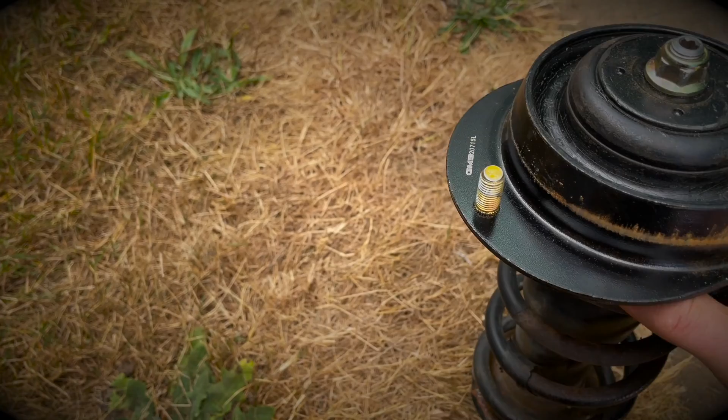Fellow Sambarians. So, as you can see, I've got Goober Chan, my green Sambar Dias, with me today. EN07F, which is fuel injected, KV4, which is four-wheel drive.

We're going to be doing connecting rod bearings in this old girl today. She's been kind of making a little more chatter back there. That makes me very nervous. I have a Sambar here that's got a hole in the block, so I don't want it to get to that point. Depending on how well the oil was changed in Japan and how often it was changed in Japan can certainly determine how long those rod bearings are going to last.

When I did do the red valve cover, it was pretty gunky inside, so I would say that oil changes weren't a top priority for the van. So with the noise that I'm hearing, which is a pretty distinct noise, it's under high revs. You can hear it like a rattling noise a little bit. I'm starting to hear that.

And other ones that I've changed the rod bearings on were really bad, and under any acceleration you would hear that. And that's basically the rod slapping on the crankshaft. So I don't want to damage the crankshaft by spinning a bearing and all that stuff. I would rather just change the bearings now.

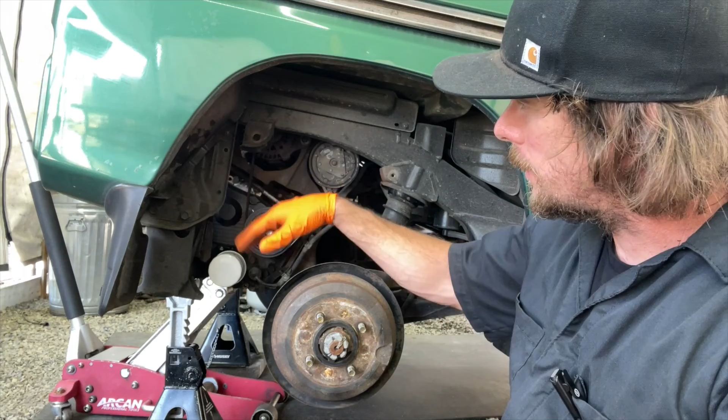Okay, so as you can see, I have access to everything. Taking that panel off, which is 10 millimeter, 10 millimeter, and then there's a 10 millimeter on that little crossbar right there. Those are two 14 millimeters holding the crossbar up, so just take that off. That makes it easier.

What also helps is let the e-brake go. Don't set your e-brake so you can get this thing to spin freely. And now I'm going to get the puller and we'll pull the inside, the inner axle out only. But I'll get the slide hammer, and everything is clean down here right now because I just did a timing

kit. So new crank pulley, because these have a rubber balancer in there, so harmonic balancer, so these can separate over time. So I got a new pulley in there, new belts, new covers. So everything looks really good here. It's just when we go here, not so good. Not really leaking oil, it's just rusty. I mean, look at that. There's like chunks ready to come off of it. But yeah, let's get that axle pulled out now.

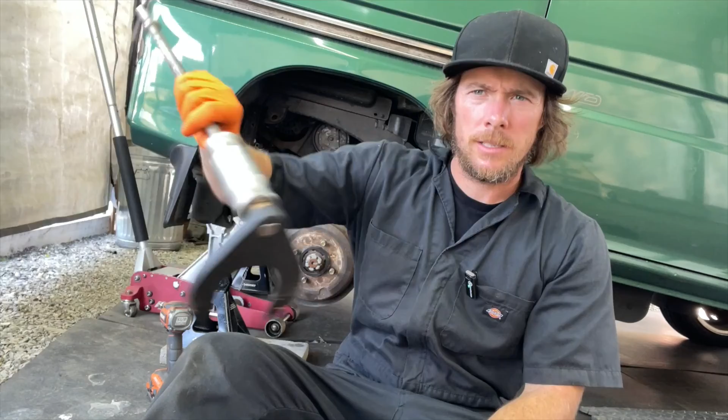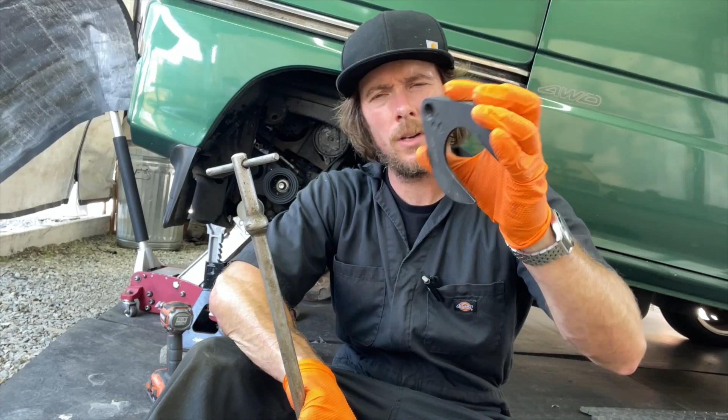So if you're still watching, good, because I'm going to give you a little tip here. So if you get a slide hammer off of Amazon or something, they're going to have two different tips or two different ends, claws. And the smaller of the two, I think it's like 40 something. I could be wrong, don't quote me. It's just the smaller one. The smaller one works on the Sambars for the front and the back.

But let's say you have an Acty as well. The Acty takes the 63 millimeter claw, takes the bigger one. So just keep that in mind. If you get a slide hammer and you get the two attachments, the small one is good for the Sambar and the big one is good for an Acty. So I'm going to go ahead and take this one off, since I had to pull an Acty axle the other day to do a boot.

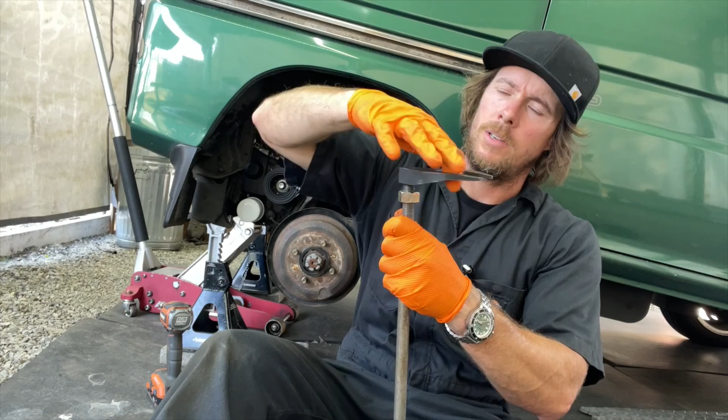We'll put the Sambar one on, or I should say the one that fits the Sambar. And I mean, this is a really good tool to have anyways. Makes pulling the axles out so much easier. It's still a bit of a struggle, but it makes it easier. So let's go ahead and pull this axle out. So pulling the axle can be a little frustrating. Just don't give up. Just the trick that I figured out, which, yeah, it sounds pretty obvious, but in the moment, you're just frustrated.

Pull on it. Pull on it as hard as you can. Like, really lean back as you're pulling on the end and slide the hammer back. Don't just use this as like the force to pop it out. You really want to lean back, full body weight, and slam this thing back as hard as you can. That's the trick, because otherwise you'll be fighting it just trying to use this as the pull force only. But if you're just pulling on it and then pop it, you'll get a good pop, and then this will happen. Boop, there's our axle, it's out.

So I'm actually gonna go get something to hang that thing up on so it doesn't just dangle and rip the boot. So I'll be right back. But okay, so I took a tow strap, I have it pulled up against the control arm and out of the way. That way we have all of this room.

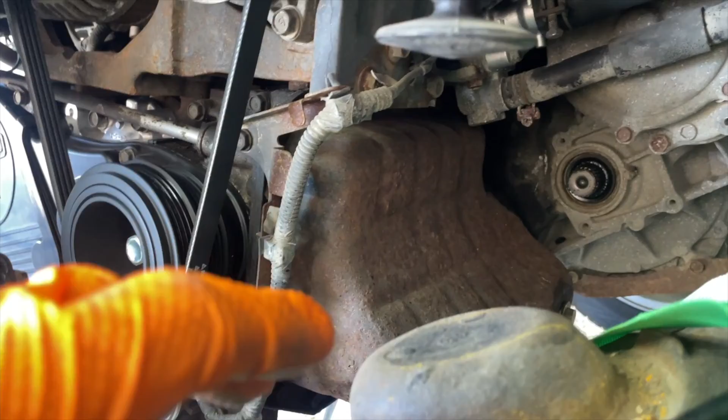Now, I'm just saying, there might be some comments. You don't need to pull the axle. Yeah, I know you don't. You can do it leaving the axle in, but it's a pain in the butt. Or at least it's just a lot easier if you have the axle out. So I'm going to save myself the headache and remove the axle.

I got some visitors. Where'd they go? Let's see. There, well, there's Mamacita. Hi, little peepees. Oh, hi, patitos. See you later. It's a hot one today. They're probably going to find a pool.

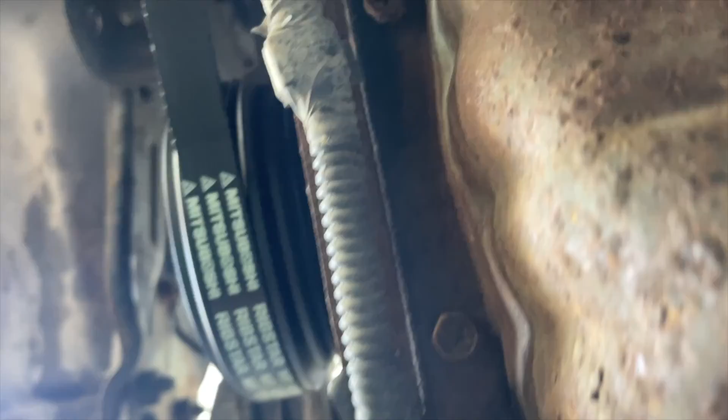Yeah, let's get that oil drained and get some new parts on this girl. So now that we have as much oil as we can drained, we'll get all the 10 mils. So there's a couple back there by the bell housing, and then along the top, and then along the side here. I don't usually remove this wire loom support bracket deal.

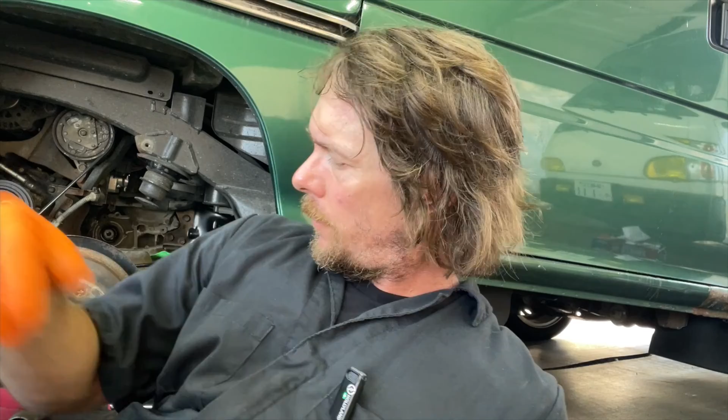I usually just leave that on there. If you feel like you need to take it off, you can take it off. It's just a couple clips. But yeah, you can work around it pretty easily. So let's pop all those 10 mils out. So once you get all the bolts out, there's quite a few, it's probably going to be stuck to the block still. So get yourself a good rubber mallet or like a pry bar and carefully pry it apart.

Oh, there we go. We're getting there. Put a pan down there just in case. Oh man, that's dirty. All right. Oh my gosh. It's pretty nasty in there. Not what I wanted to see, but hey. I kind of had a feeling it wasn't going to be clean by the looks of the rocker assembly when I pulled the valve cover off.

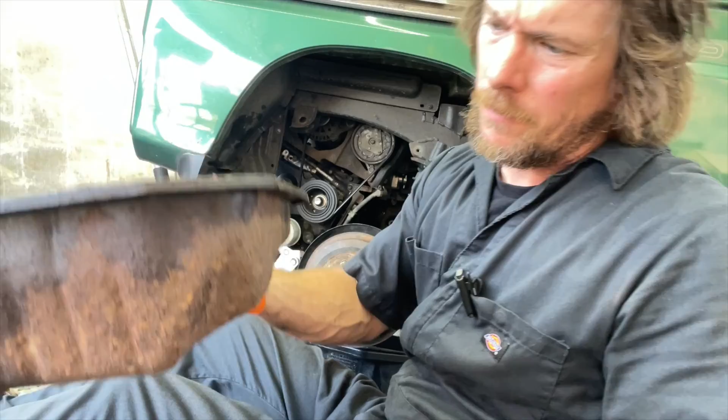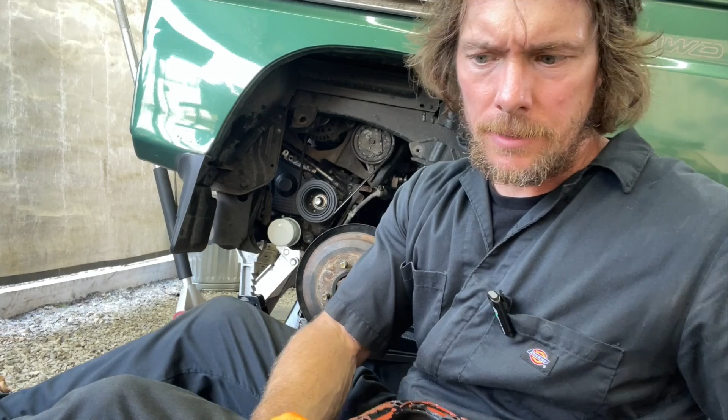But let's take a look at the oil pan. And you can see, so rusty. You can see it bubbling on the inside, so yeah, it's scary. Yeah, it was a matter of time before something broke that thing. Okay, so we're going to throw that guy in the trash.

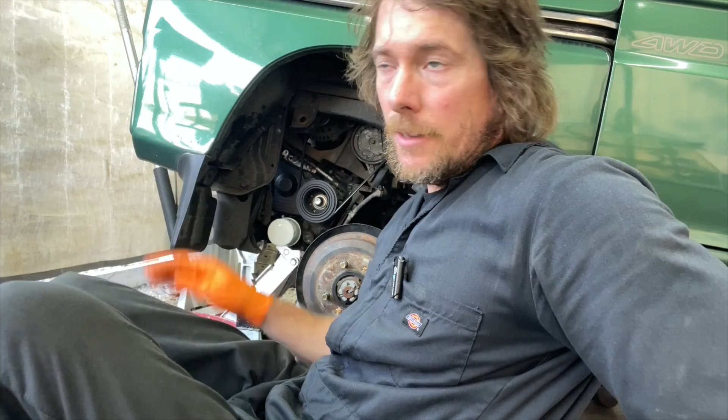And now that we have our pickup and block stiffener exposed, I can't really get the camera in there. It's a bad angle, but once you see in there, you see block stiffener and you see the bolts. Let me just give you a visual by holding the camera down there. So that plate, that big plate right there that covers everything, is your block stiffener. That is your pickup. Obviously, there's something in there, probably some gasket material or gunk, but we're going to be replacing the oil pickup and replacing the block stiffener plate.

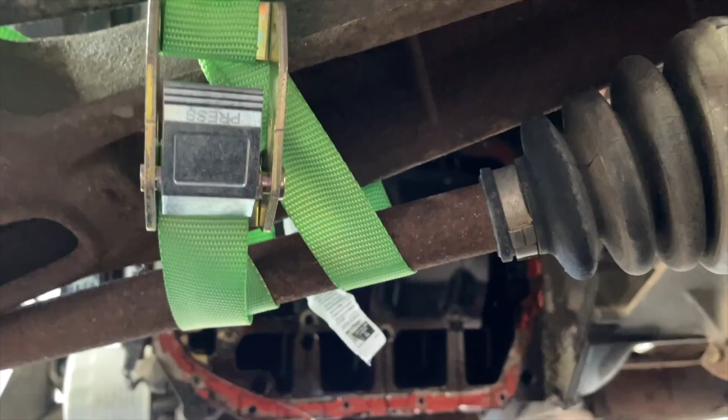So I thought I had bolts, but not entirely sure. We'll see what's in my stash, but we'll save the old bolts and put on the new parts. So let's get on that. So the very first thing you want to remove is your oil pickup. So that's just four 10 millimeters. So take your dipstick out, and right there's a 10 millimeter, right there's a 10 millimeter, and then down here are two 10 millimeters. So remove your oil pickup, and some more oil will come out. So make sure you got something underneath there, because it'll kind of break the suction and more oil falls out.

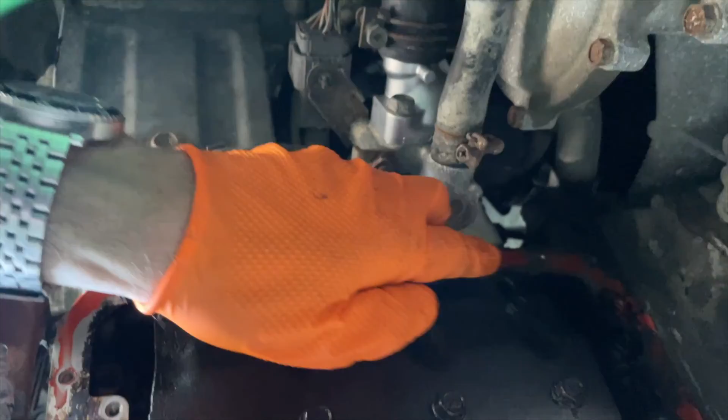So now that the oil pickup is out, which there it is, I'll kind of look at it, see what we got going on in there. Now we can remove the block stiffener plate, which looks like 10 millimeters around the outside, and then four 12s going across. So now we'll take that off. Block stiffener has been removed. Sorry, I can't get good video while I'm doing it. I can't get my camera in here or hold it anywhere. So you get the four 12 millimeters going across the center, and then you have 10s on the outside. So remove your oil pickup, four bolts, then remove your block stiffener. Both right there, which I have new parts for, so they're just gonna get set aside.

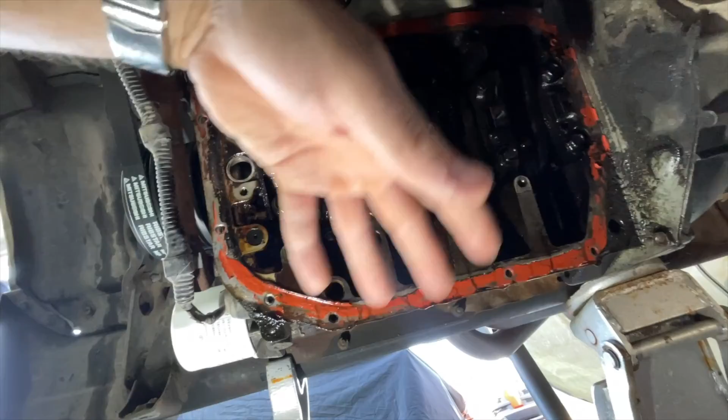Now we have access to our connecting rods. So it's very dirty in here, which is a total bummer, but it is what it is. We are going to really do a good job. Let me fish out of this. There we go. Cleaning all the red RTV off of the block. I have a good carbide scraper and gasket scrapers we'll use to get all that off, because we want it to be super clean. It might take a while to get the whole job finished, because you gotta let all the oil stop dripping down on the block. So you can do a really good job of just wiping up the excess oil at the bottom until it stops. But obviously you don't really want oil dripping down when you go to put the new pan in.

So now we have access to our connecting rods. We can get our feeler gauge and see how much side-to-side play we have. We can make sure that we are within the factory specs of the play that it should have.

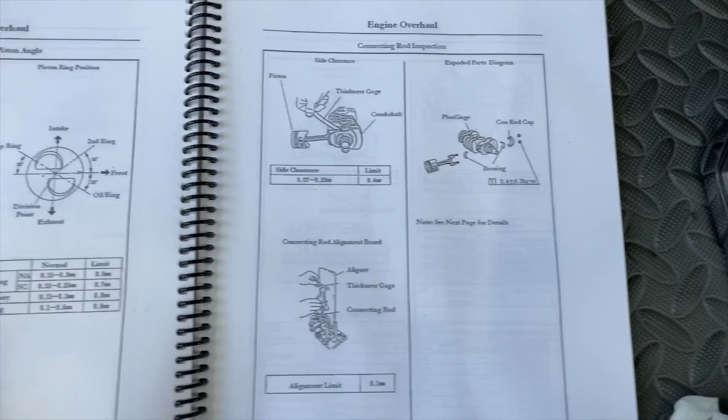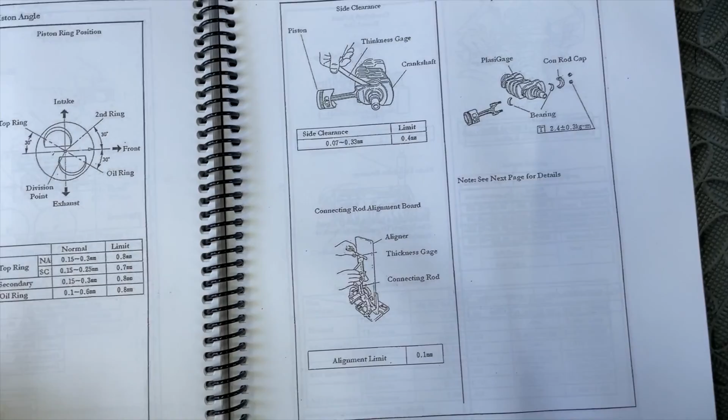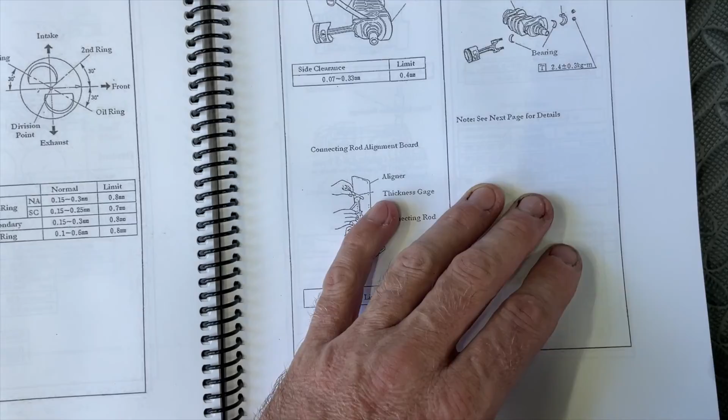I mean, to be honest with you, I bought it from GNR, which, no offense to GNR, they just copy and reprint the James Danko book and then sell it bound, which, you know, good for them. They're making money, but you can get it for free online. So save yourself the money.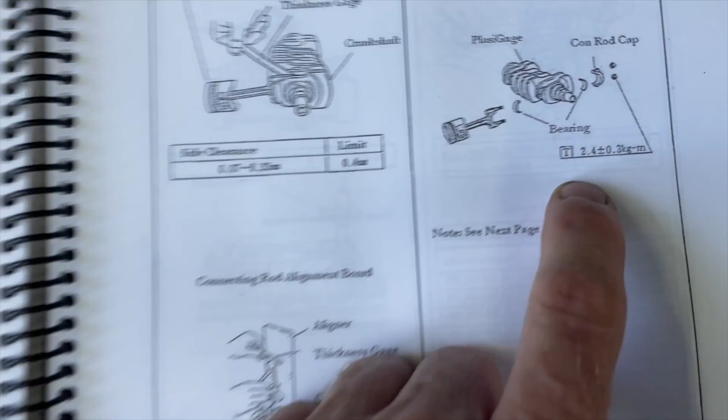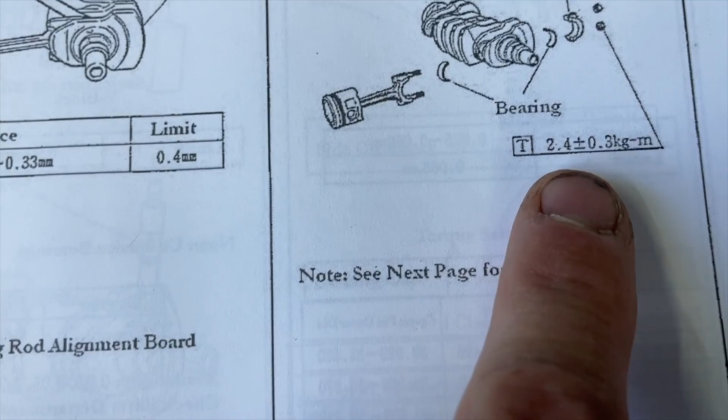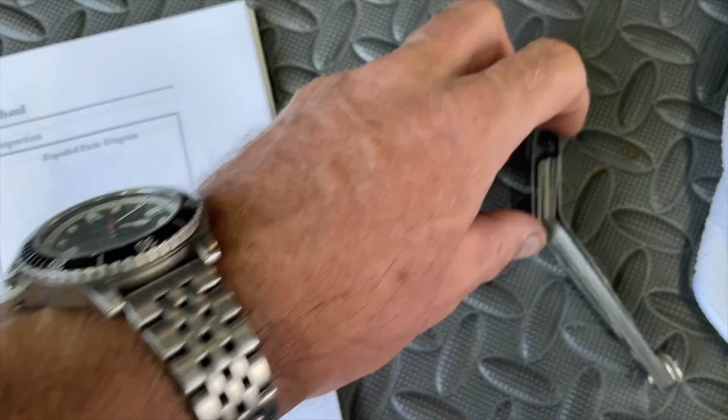Okay, so our side clearance right here is supposed to be 0.07 to 0.33 with a limit of 0.4. So we're going to check the side throw, and here is our connecting rod cap torque, which I think is like 18 foot-pounds. I'll do the conversion later, but I think it's like 18 foot-pounds or something. But we're gonna do 15-ish foot-pounds because 18 was really tight and I don't want to break anything. So I'm gonna check that real quick with our feeler gauge, and then pull the caps, and then that's our torque when we put our connecting rod caps back on with the new bearings.

Okay, I'm gonna briefly kind of show you how to check again. It's a pain in the butt trying to show this stuff, but I'm not even able to get a 0.3 in there. I've got a 0.203 millimeter feeler gauge, and it just barely fits in the side to sides on the connecting rods. So I am definitely way under the danger zone, which is maximum 0.4. So that is good. Just check them all just to be sure we're good on that.

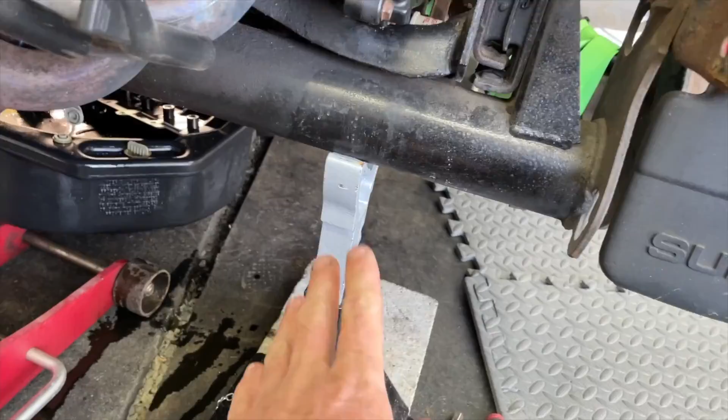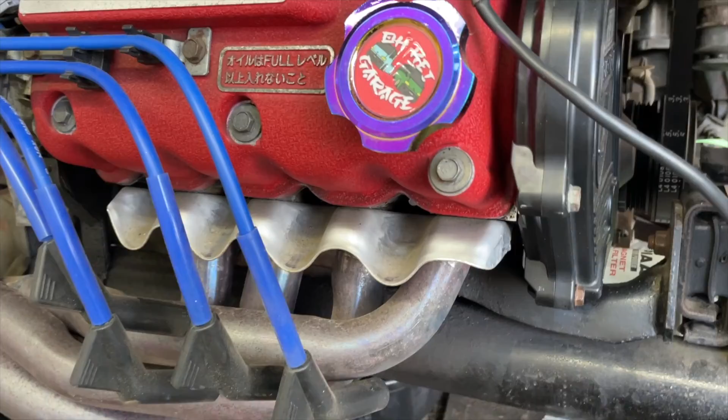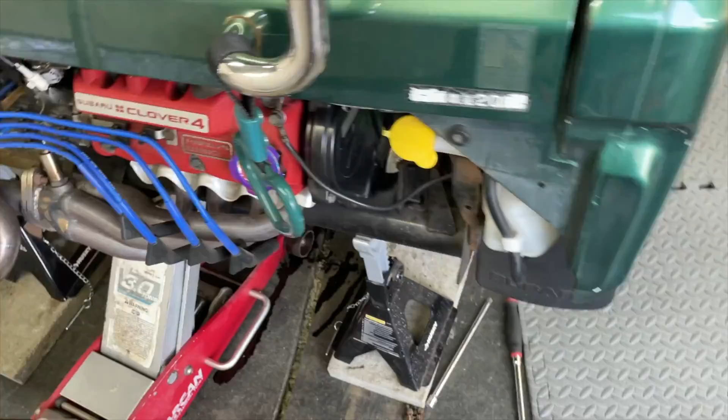So now let's start taking the connecting rod end caps off. I forgot to mention, the connecting rod end bolts, the end caps, are 10 millimeter. I thought they were smaller for some reason, but to make it easier to turn the crankshaft and push the piston up and down, take your spark plugs out. I forgot to do that, so I'm going to take my spark plugs out. That way we can turn the engine over and get stuff out of the way a lot easier than trying to fight the suction in the cylinder. So yeah, 16 millimeter. Let's pull the spark plugs out.

Okay, with the spark plugs removed, it's easier to turn the engine now or push the pistons up and down, since there's no suction in the cylinder. So 10 mil. Let's start taking off the end caps. Pretty self-explanatory on how to remove the connecting rod ends. Unbolt it, and then you can get a 17 mil on your crank bolt and turn it, and it will eventually just kind of loosen up. Don't use anything metal. I actually grabbed a plastic trim piece to help push the bearing out of the upper connecting rod because it's pretty well stuck in there, and we're going to see why it was a good reason to change the bearings.

Here we go. There you go. There is the copper. There's the copper. So we're worn through the Babbitt or whatever it's called. So that was probably the noise I was starting to hear. That is the top one. Here's the bottom one, still silver. So usually it's always these upper ones that are going out.

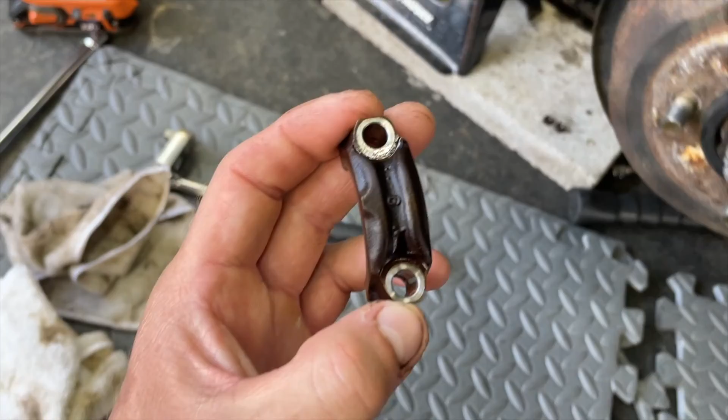So I'm just doing cylinder 4 right now. No, I'm sorry, cylinder 1 right now. We'll put the bearings in, and then we'll get this one all torqued up and ready to go to move down the rest of them. Also, make sure you pay attention to your orientation on your connecting rod end. There, it's got that end that's notched. You can look at the other ones. That's why I say do one at a time.

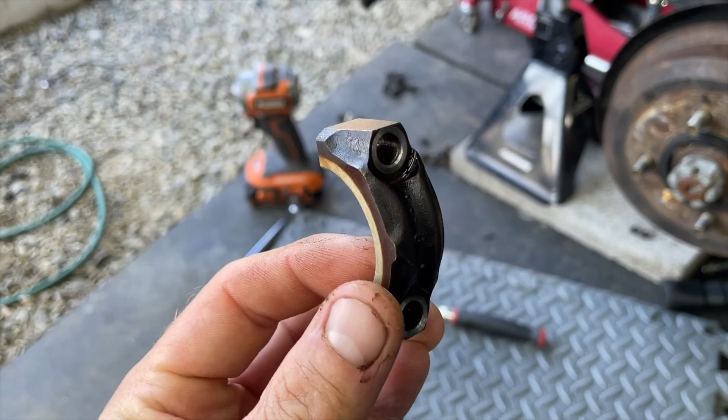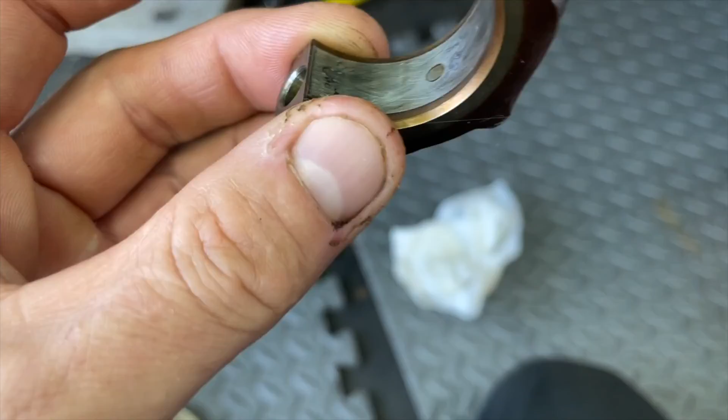It looks like a number and then a Y. So I believe the Y goes on the bottom like such. But just look at the rest of them before you put it in there and make sure you're putting it on in the right orientation so you're not jamming it in there upside down and it's not going to work properly.

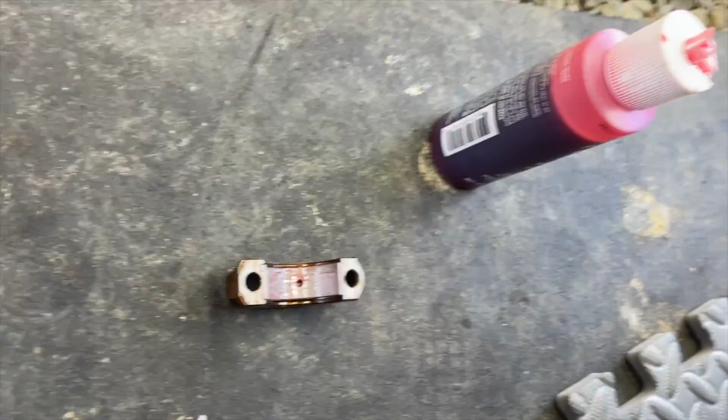But I got my engine ultra slick lube. We will clean this up and we'll clean up the connecting rod in there, and we'll put the new bearings in and on the connecting rod, lube it up, and then we'll torque it down. So let me clean some stuff up and get it ready. Okay, so I only want to try to do this once because it sucks trying to touch the grease and then use your phone, and it gets really messy.

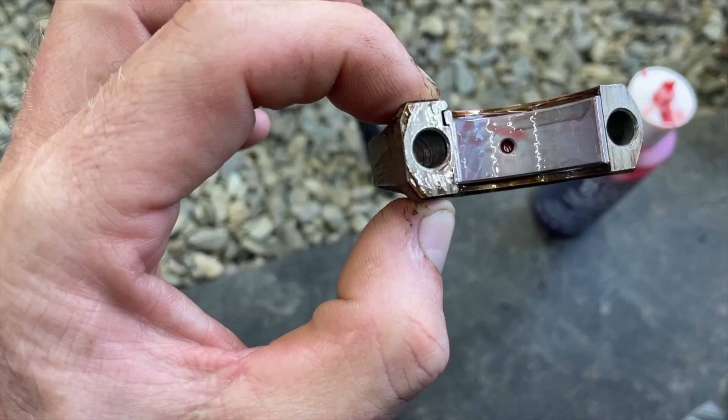So I take the ultra slick, I put it on both sides of the bearing just to make it easy to slide into the connecting rod end cap, and then obviously on top. And then there's some in that little journal there. And you're going to make sure that the bearing is pretty much flush sitting in there. And when you tighten it down, if it's off by a tiny bit, it'll pull itself in straight.

And then obviously in here as well, when we put the new bearing in, lube it up as well, and then get it in there flush with each end. Make sure the notches in the bearing line up with the notches on the connecting rod ends and the connecting rod itself, so everything's right. And then, like I said, make sure you put your end cap in the same direction as the rest of them are. So it looks like the Y is on the bottom. It looks like a 9, some number on the top. So make sure that number is on top.

I sprayed down the crankshaft a little bit with cleaner, and then put some of the ultra slick on the crankshaft itself. And we'll go ahead and put this back on, and then we'll torque it down, and I'll show you the torquing specs. Okay, so the book calls for 2.4 kilogram force meters.

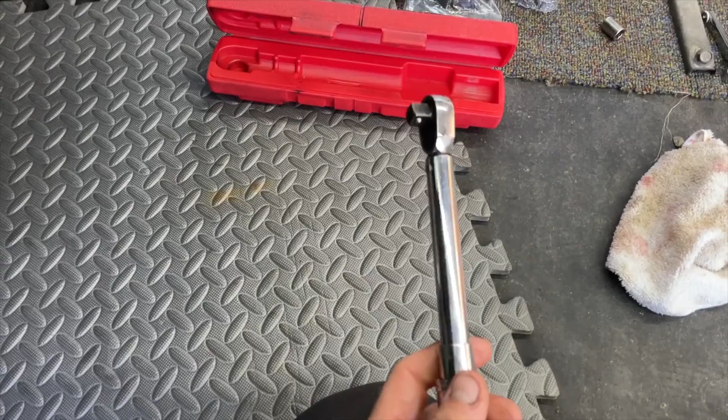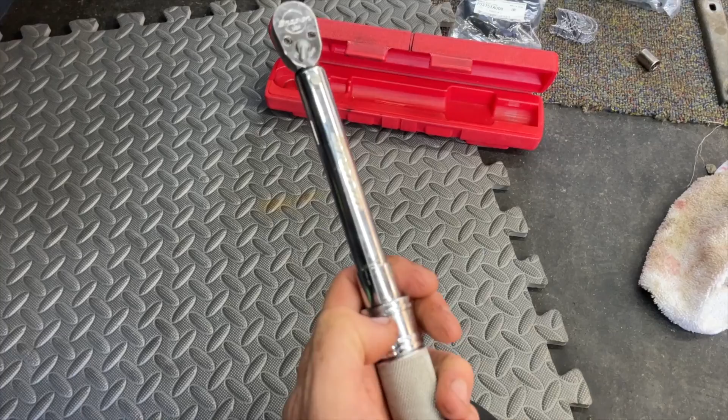So 2.4 kilogram force meters converted is 18 foot-pounds. I'm going to go 15 foot-pounds and see how that feels, and that's about 180 inch-pounds. So I'll do 180 inch-pounds, and if that feels good, I'll be good with 180 inch-pounds. I don't want to go too tight because I don't want to strip or break anything. 18 foot-pounds just seems crazy, which I think I did on the last ones, but other guys broke stuff. So maybe on the older trucks, it might be a little sketchier going that torque. But let's do 180 and see how that turns out.

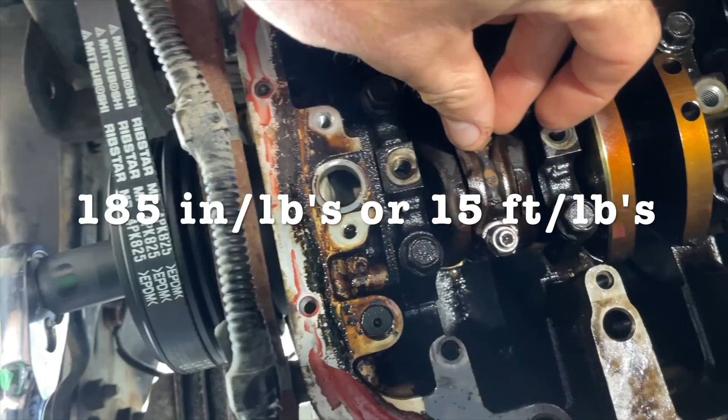Okay, end cap torque. I like 185 inch-pounds. That feels super snug. It gets to the point where you're like, oh man, that's super tight, and then perfect. So 185 inch-pounds, just a little over 15 foot-pounds. Seems like a safe number. So I'm going to go with 185 inch-pounds across all of them. So that one is done.

And we just did one. You saw how that worked. So now we're going to go ahead and just do all three of them. And like I was saying, get yourself a wrench on the crankshaft. Get it all, there we go. So that one will be ready to go. Pumping oil out of my oil pump. That one will be ready, and cylinder 2 will be ready, and then we'll knock out cylinder 1. All of the bearings have been changed, torqued everything 185 inch-pounds all the way across.

I gave it a good 3 or 4 turns, made sure nothing felt like it was binding up, nothing felt weird, very smooth. Then went back after I spun it a few times, retorqued it just to double check, doesn't hurt. So now we are going to, I have a carbide scraper and some gasket scrapers.

I really like my carbide scraper I got off of Amazon. I'm going to use my carbide scraper to get all this red RTV off and just get it all super cleaned up down here. And then we'll go ahead and put the block stiffener back on and the oil pickup with the new O-ring back on, and then we'll put the new pan on. So let's get all this red RTV off now.

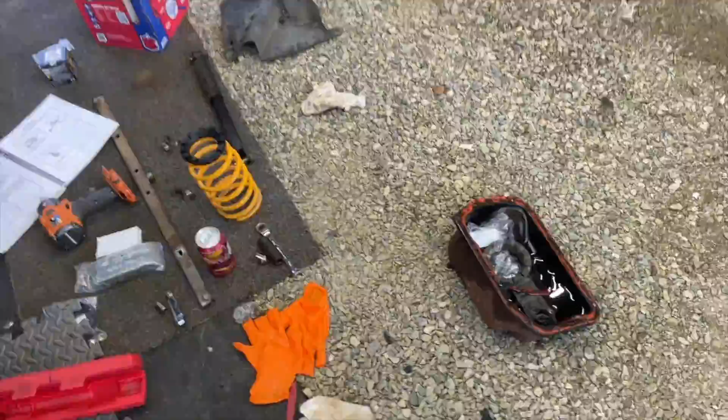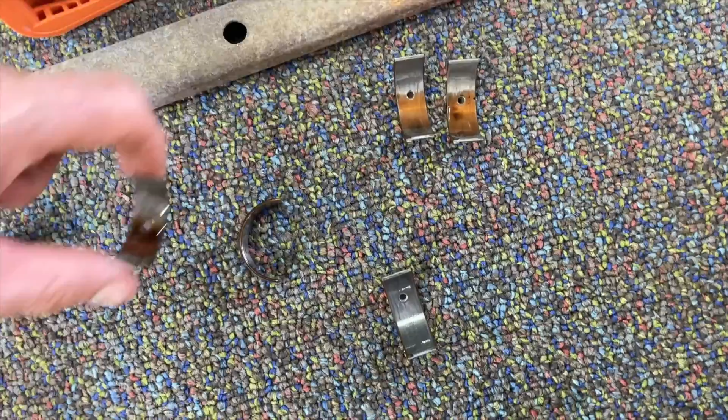Oh yeah, and let's review the bearings. So all the top half of the connecting rods, the upper portion, were all worn out. This one was really bad. It's got some pitting going on. After inspecting the crankshaft, everything looked fine. I'm not sure why that's pitting. I'll have to look in the book and see what causes pitting. I don't know if it's just heat, but that one's definitely most worn out of all 4.

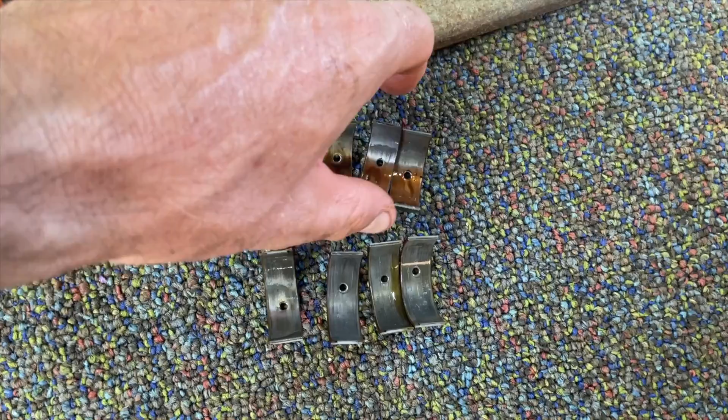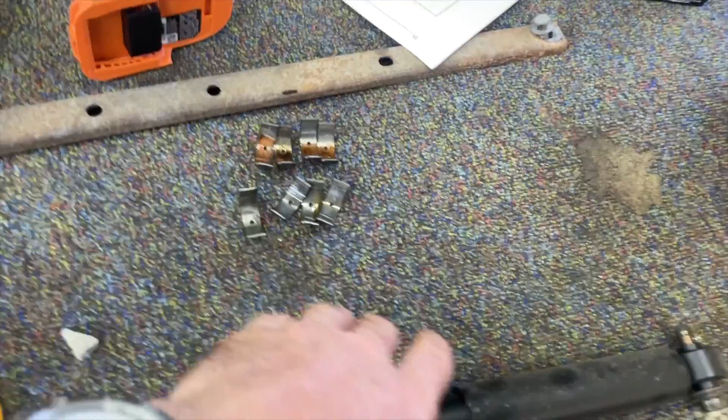And the lower sections, they're all good. They're all still silver. So it's that upstroke that's putting all the wear on the bearings and the connecting rods. So again, that's why I stress, always change that oil more often than you think is necessary, just to keep these things all super lubed up, and use a good oil that can handle high temperatures. So anyways, kind of fun. Got some bearings here. Okay, block has been cleaned up.

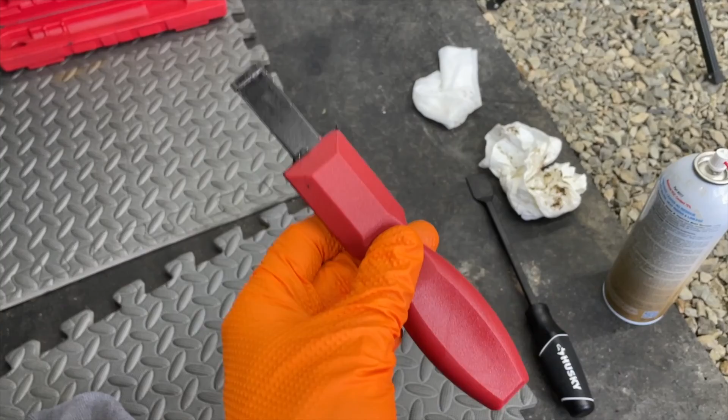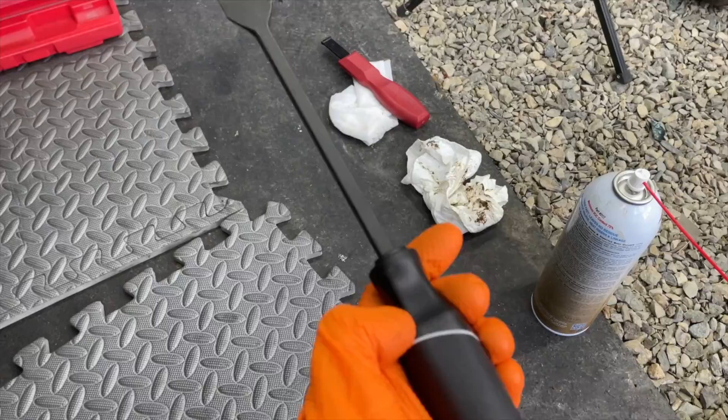I'll show it in a second here. This has been my go-to lately, this carbide gasket scraper. I got it off of Amazon, 2 sizes. So super effective at scraping composite gaskets off the head, just cleaning up surfaces. Really good. It just has such good bite on that tip. I also have the Husky gasket scraper, but this thing is amazing. That's my new go-to for gasket removal for sure.

But let's take a look so you can see. Let's do fisheye. So just get really clean all the way around. Where's my light at? All the surfaces that mate with the pan. Just get really clean. You don't want any oil, residue or nothing on there. We want to make sure that RTV does really good because there's no pan gasket. So I'm going to let this sit for a little bit, make sure no more oil drips down.

Now that it's all clean, we'll get the oil pan... Well, no, we're going to put the block stiffener on and then the oil pickup and then the pan. Just getting a little ahead of myself there. Oh, because that pan has got to go.

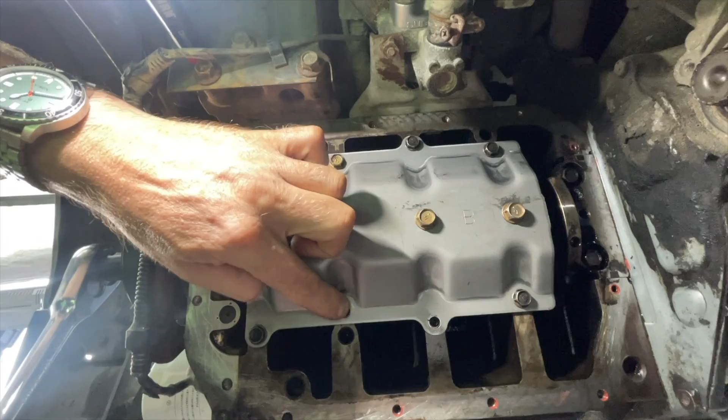New block stiffener installed. So these two bolts right here are left empty because your oil pickup has two here and two here. So here's what I did for torque specs. The book doesn't have any torque specs for the block stiffener. It does, however, have torque specs for the oil pickup, which is about 60 inch-pounds. So this is what I did. These are obviously bigger bolts in the center, the 12 mils. I torqued these to 25 foot-pounds, which felt really good, nice and snug, not crazy tight.

So 25 foot-pounds on the center ones, and the outer ones I torqued to 75 inch-pounds, not foot, inch-pounds. So just the smaller ones. Like I said, it calls for 60 inch-pounds on these, but it just feels a little too loose, and I don't want it coming loose inside the engine. 60 inch-pounds is what I torqued the valve cover to, but we're going to torque these pickup bolts and the outer block stiffener bolts to 75 inch-pounds, and these are 25 foot-pounds.

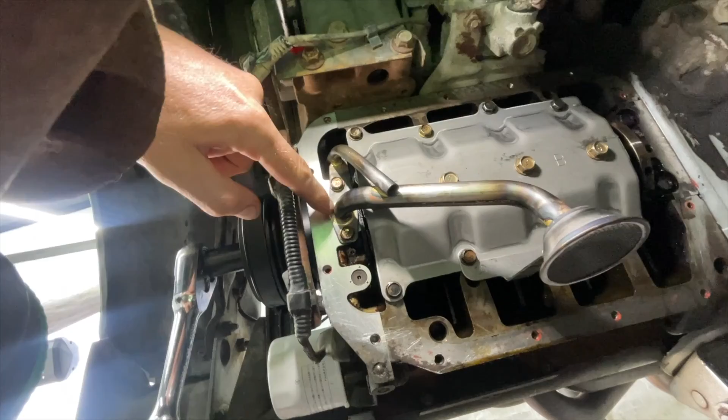So I'm going to go ahead and put the new pickup on now. New pickup installed, 75 inch-pounds for the small little 10 mils. That feels really good. I like that. So now that that's installed with the new O-ring, make sure you get that O-ring in there so you get good suction and oil pressure.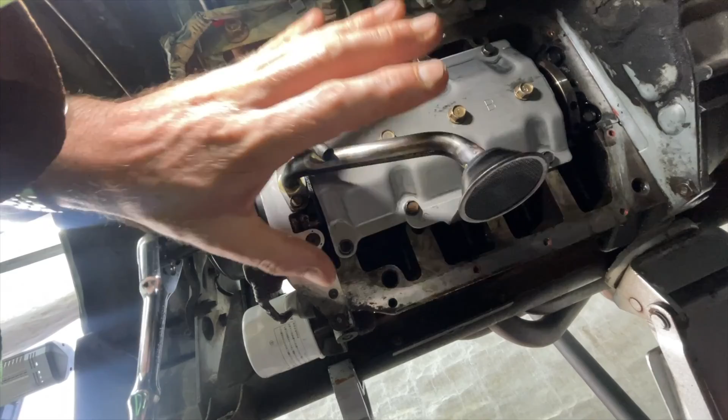Now I'm going to, I think I'm going to take a little break because I want to make sure all the oil stops dripping down. But we can prep the oil pan for gasket sealer and get ready to hang it up there. We won't fully tighten it, but we'll get it hung up there. So we let the gasket sealer adhere to the block first, and then once it's fully cured, then we tighten it. So yeah, let's just let this kind of do its deal.

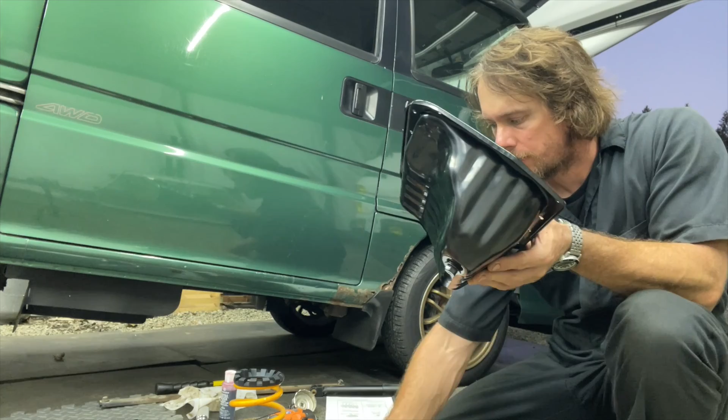There's just a little bit of oil coming down, not a lot. So I would guess it should stop pretty soon, and then we'll get moving on. So the trick with doing the oil pan correctly, and some of you guys probably know how to do it, I'm just telling you from experience. I wasn't entirely sure how to use a gasket sealer on an oil pan, and it probably took like 4 or 5 tries. This was a very long time ago, and I just kept getting oil leaks out the oil pan. I couldn't figure it out.

So the trick to using a gasket sealer, if you have no pan gasket, is to lay your little 1/8 inch bead all the way around on the inside of the bolt holes. You don't need to go around it. You just do one line inside the bolt holes. If you go around it, you're putting so much RTV on there, and you risk getting inside and getting up in the pickup and clogging that screen. It's a very fine screen. You just need to do a little bead on the inside. That's it. I'll show you.

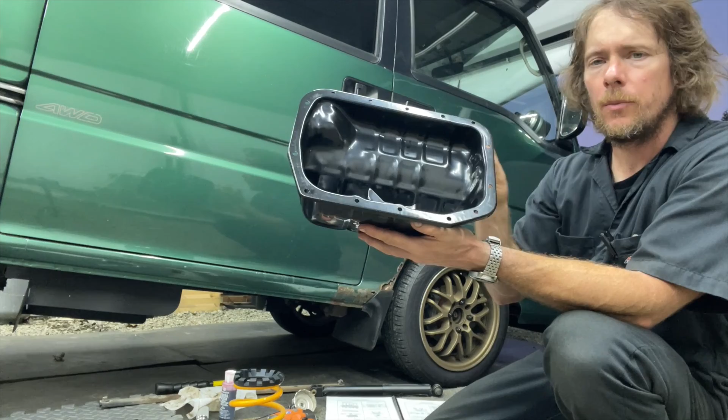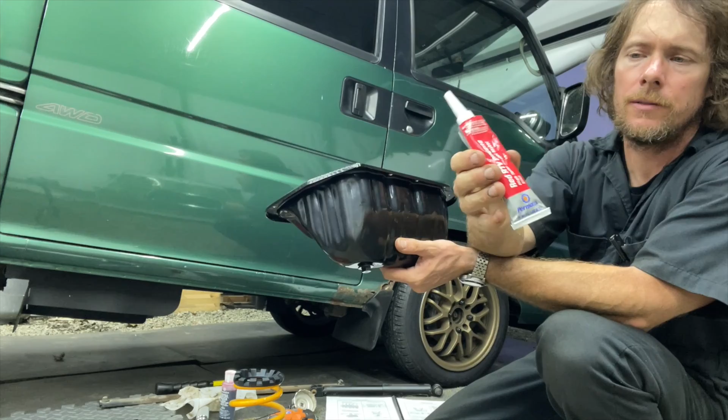But the trick is basically to put that bead down, and you'll put it up against the block, and you will just take your bolts and finger tighten them till it just starts to squeeze out a little bit. And then at that point, you leave it alone, and you do that all the way around, finger tight, and you let it sit. It says an hour on the gasket sealer, the red RTV. This is stuff that, pretty sure, they use from the factory because it's red. I forget where I was going with that, but oh yeah, it says let it sit for like an hour. I let it sit for like a few hours, and then come back and torque it.

Torque all your bolts to 60 inch-pounds. 60 inch, not foot. There's a lot of guys that get confused with that. It's not foot-pounds, it's inch-pounds. Breaking valve cover bolts and stuff. You'll torque it to 60 inch-pounds, and then you'll let it sit for 24 hours before you go and throw oil in it. I know it's a process and you got to be patient, but it's worth it because you don't want to have to take the axle out and do all that stuff all over again because you got impatient and wanted to put oil in it before it fully cured. So you really don't want it to leak.

So I'm going to go ahead and put the gasket sealer on here, and then we'll get it all hung up to start drying. Okay, not very pretty, not my best work. My hands are a little tired. That bottle did not want to squeeze. But just a good little 1/8 inch bead all the way around on the inside of the bolt holes. You don't need to circle around it, just inside. All the way around. Don't put too much because it will squeeze inside and we just don't want it to clog up an oil journal or something and starve a bearing.

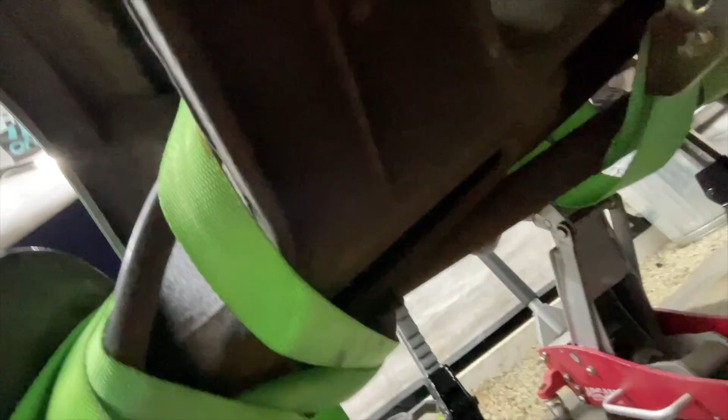So I'm going to get all the new bolts and then we'll hang it up there so they're touching, and then that way we can let it start to cure and then we can torque it up in a few hours. Right, oil pan is installed up there with all the new bolts, shiny bolts.

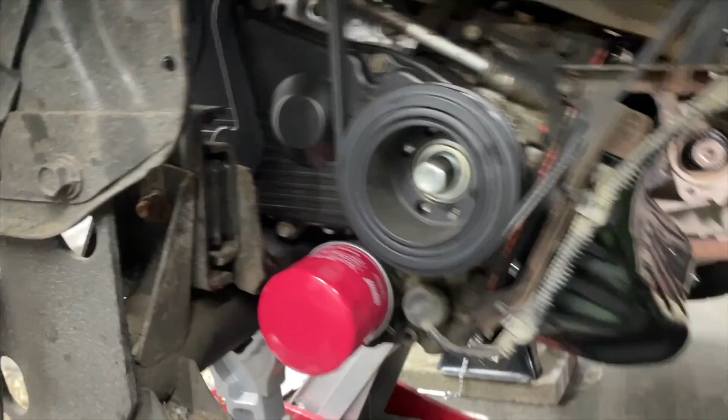But they're all finger tight basically. So it just starts squishing the sealant out a little bit, and then we're gonna let it cure for a few hours, and then we will come back and torque them at 60 inch-pounds all the way around, and then we'll wait like a good day and put oil in it. In the meantime, I changed the oil filter, got that STI on there, really nice. It's really late right now. We will probably be finishing it up tomorrow, but boy, that looks good with the new shiny bolts and everything. Engine looks so much better now with that oil pan and all these new side plastics and pieces. So much better.

She's looking good, minus all these rusty spots, but we'll replace that skid plate, so that'll be something shiny. Anyways, I think I'm gonna call it a night, and we'll get back to it mañana.

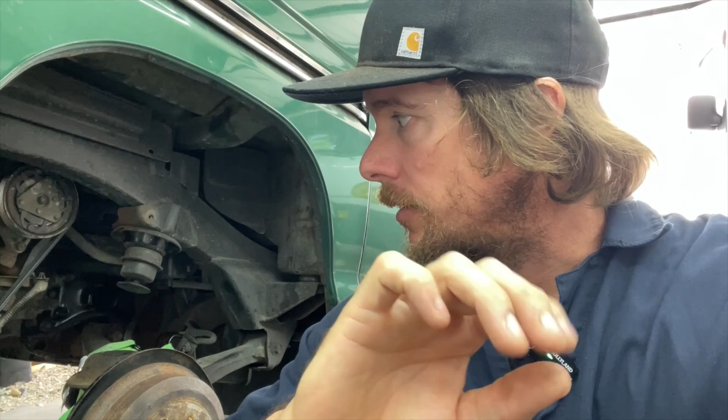So, like I was saying with the oil pan, you put your sealant on, you finger tighten it up, just so they're touching each other. It says wait an hour. I waited a good 3 hours, and then I went and retorqued everything, fully tightened, and now we're just about 24 hours after we put the pan on, so I can add oil to it finally.

So let me show you the torque sequence just to help you out with that. Obviously I already did it, but so you can visually see a good pattern. When you put your oil pan on, start with the center bolts, top, bottom, in the center, and then zigzag and work your way out. And then once you get to the outer ones, go back around and just check the torque on all of them, and you can go in a circle at that point.

But just start in the middle, and it's 60 inch-pounds, like the valve cover, 60 inch-pounds all the way around. It's not very tight, but it's good enough. Pretty snug anyways. But yeah, start in the middle, diagonal, zigzag to the outside, and then go all the way around one more time, and that should be good.

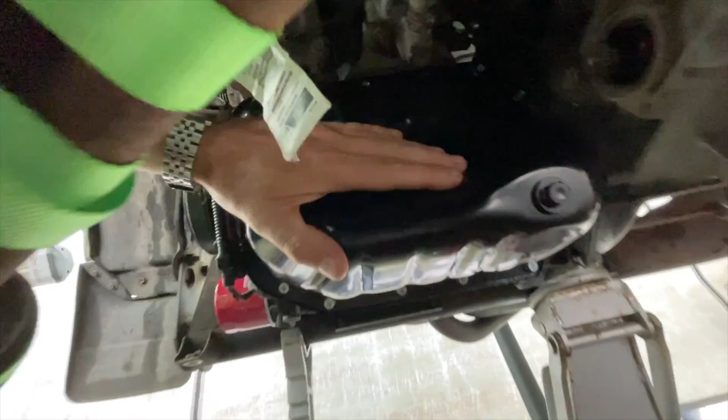So now that that's all good, we should see just a little bit seeping out, not a whole lot, but just enough. You don't want to see gobs of it because then that means you put way too much on. But yeah, new oil filter, we're gonna put oil in it and fire it up and make sure we have no oil leaks and everything sounds hunky-dory.

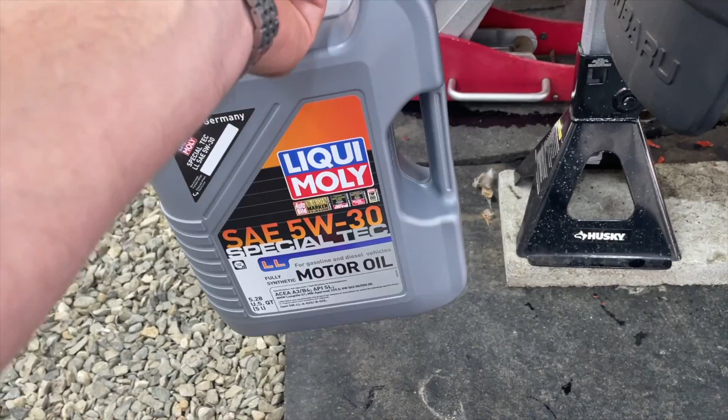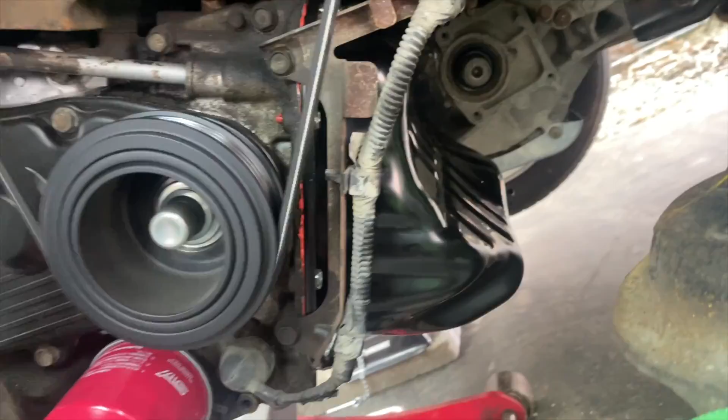All right, I got my 5W30, about 3 liters inside the engine, and we're just running it to make sure we don't get any leaks. And so far, my main concern obviously was leaks from the bottom. And I don't hear any. I don't see any leaks. So that is good.

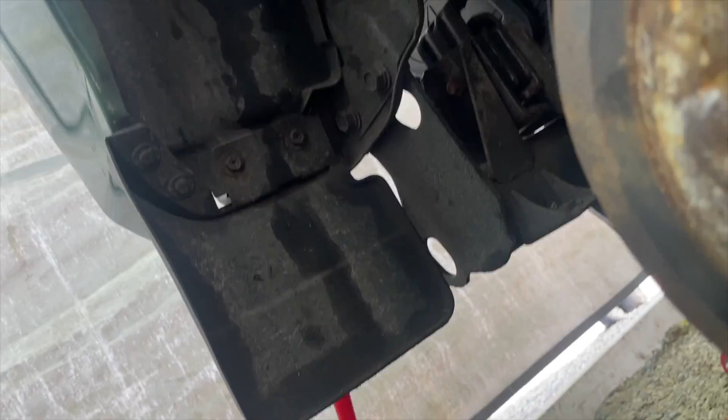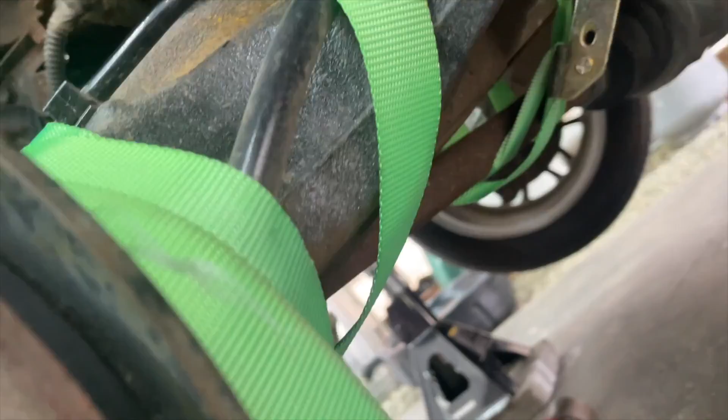But I'm going to let it idle for a little bit and just keep an eye on stuff, because again, I don't want to have to rip it all apart if it's leaking oil. But everything looks good. Everything sounds good. So I'll let that idle here for a little bit and make sure I don't hear anything weird or see anything weird that shouldn't be happening.

So that's how you change your rod bearings in your Sambar. It's actually not as difficult as you would think. It's just a matter of removing some stuff out of the way to give yourself complete access. You can do it with stuff in the way, but to me it's a lot easier to take that stuff out, and it doesn't take much time anyways. I mean, popping just that side of the axle out, it's not a big deal.

And it's just peace of mind because, as you saw, I'm pretty sure I showed my bearings, they were really worn out. So it was time to replace them before it causes more damage. But yeah, there you go. That's how you change your rod bearings.